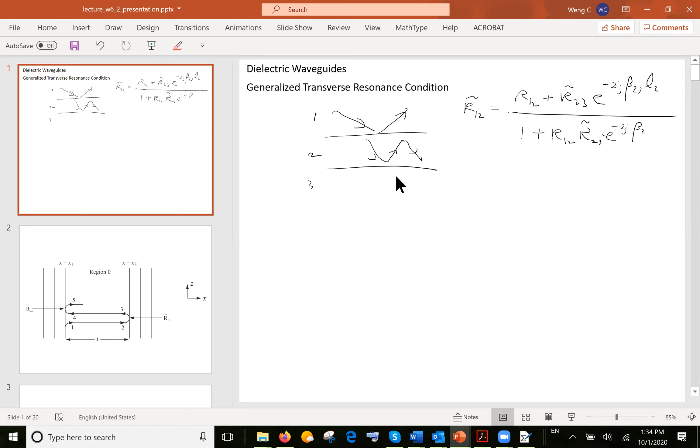Let me see, something messed up with my wiring. Okay, we show that when you have a layered medium, you can look for the reflection coefficient, the wave bounces back and forth inside. If this is 1, 2, 3, for instance, then we can say R12 tilde equals R12 plus R23 tilde times e to the minus 2j beta 2z L2, over 1 plus R12 R23 tilde e to the minus 2j beta 2z L2, where L2 is the length, or the thickness, of this slab.

And if we assume that medium 3 goes to infinity, then R23 tilde just becomes R23, which is the local Fresnel reflection coefficient. And the guidance condition is such that R12 tilde goes to infinity when a waveguide mode exists.

Because if a waveguide mode exists, then you don't need anything to excite it, and the waveguide mode would just be there, bouncing around. There'll be some evanescent wave in this waveguide mode, and then incident is zero—E incident is 0, E reflected is not 0. So if you compare incident to reflected, then R12 is infinity.

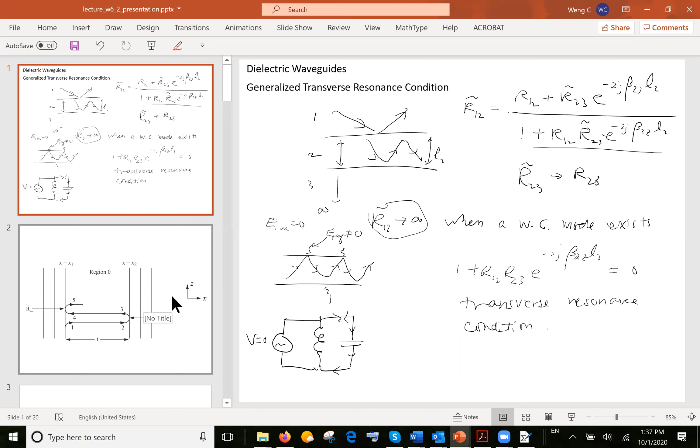Okay, so this concept can be applied for a general structure. The general structure is one that looks something like this.

Let's assume that you have a mode that is propagating in between two layered media. On the right hand side, you have a layered medium. And then on this side, you have another layered medium.

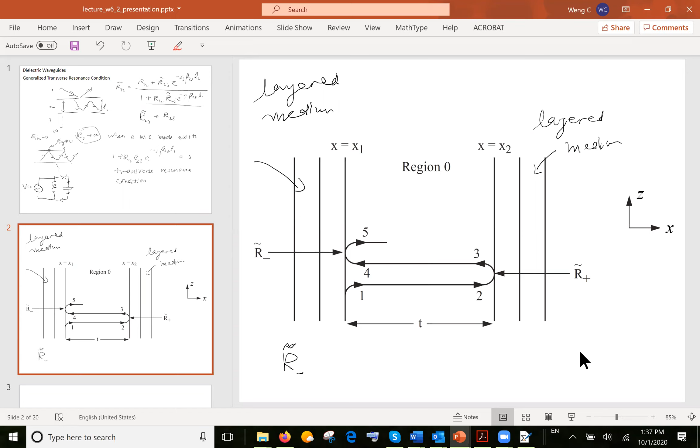And then you can define R minus tilde for a wave that is traveling like this, okay? And then you can also define R plus tilde for a wave that is bouncing off this side. And we know how to find this generalized reflection coefficient. We already figured out a formula to find this generalized reflection coefficient.

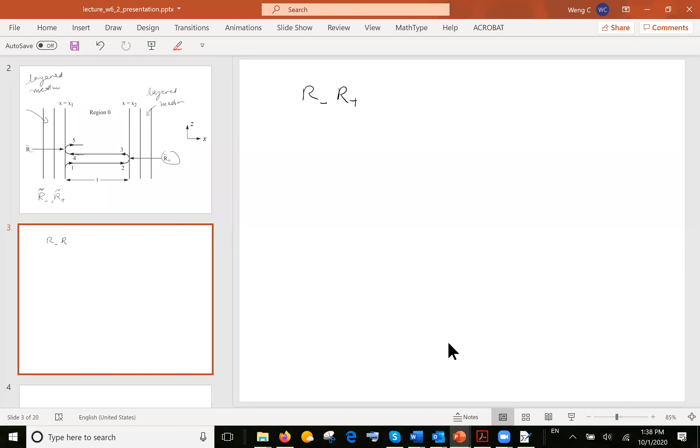Then the guidance condition is very similar to what we had before. The guidance condition is that R minus tilde, R plus tilde, e to the minus 2j beta 0, beta t z -- let me call this region T, tz -- T is equal to 1, okay? So if I call this region 0, I should use 0 here.

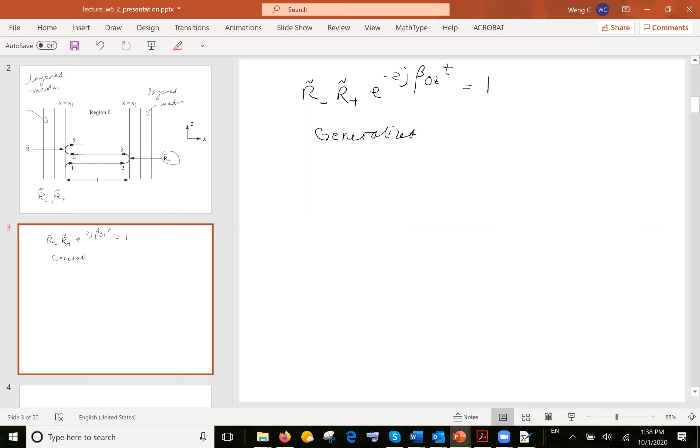Okay, and this has very good physical meaning, okay? And this is called the generalized transverse resonance condition.

And we can give it the same physical meaning as we had given before, which is that the wave travels -- you start with 1 at this place here. And then when it goes from 1 to 2, it acquires a phase. The phase that it acquires is j beta 0 z T. And then it bounces off the right interface, then it will have R plus tilde.

And then it goes off from right to left, it acquires another phase. And then it bounces off the left interface. So you can track the phase and the amplitude of the wave as it bounces around. And this must become itself. This is at location 5, then the wave becomes itself again.

And this is precisely what the above formula is saying. If you rewrite this, it's just R plus tilde, R minus tilde, e to the minus 2j beta 0 t equals 1. And this is exactly the same formula that we have derived before, using the argument that the denominator of the reflection coefficient of the dielectric slab should go to zero. Except for there is a minus sign here, so this one gave this. This is exactly the same condition as we have just derived using another argument.

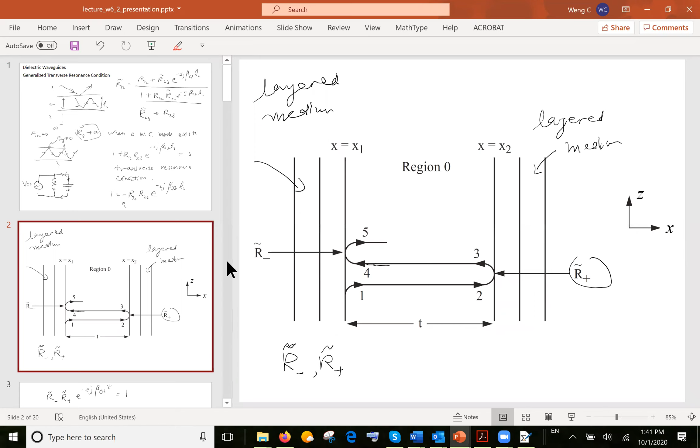Can anybody figure out why we have a minus sign here instead of a plus sign, whereas when I did this argument, I came up with the plus sign? There's no minus sign here, but then I have a minus sign here. Why do I have a minus sign here? Anybody wants to give it a try? Okay, nobody wants to give it a try. Let me give away the answer then.

The reason is because if you look at the Fresnel reflection coefficient, R12 is minus R21. R12 is defined as the local reflection coefficient when the wave is coming in, bouncing off like this. R21 is the other one -- region 2, region 1, the wave bounces off like this and gets transmitted like that. If you look at the Fresnel reflection coefficient, they're very similar to each other, except for the sign difference. That's why we have a minus sign there, okay?

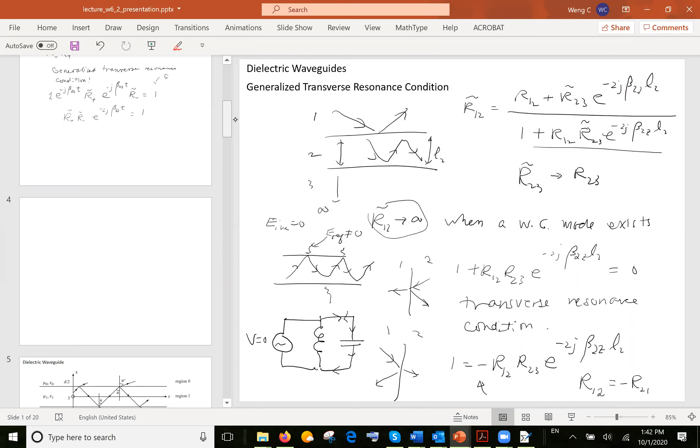So if you don't have any question, I will apply this concept to study a dielectric waveguide. No question, then apply these concepts to study a dielectric waveguide. And let me look at this special example over here. As I said before, this is a very important waveguide because the operating principle of this waveguide is very similar to that of the optical fiber.

Except that when you analyze the optical fiber, it is a cylindrical structure, whereas this one we're just assuming a dielectric slab, which is very simple. When you solve a problem in the cylindrical coordinate system, you have to use X, Y, Z, and then define a rho and a phi. Then you will have to work with Bessel functions. Whereas if you work with Cartesian coordinate system, you just have sinusoidal functions.

Bessel functions are like this. Let me just call it rho, maybe K rho, okay? And it will look something like this. You will have a peak, and then it will go like this. This is rho, this is J0 rho, for instance. It will look something like this.

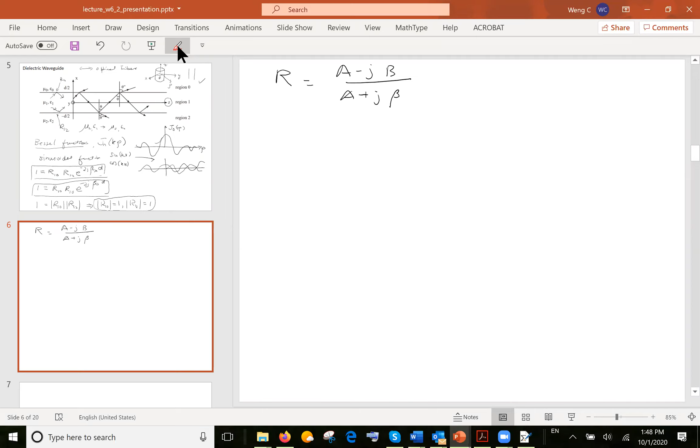Then there would be a Goos-Hänchen shift that happens. We studied that earlier, which is that the reflection coefficient will be of the form of A minus jB over A plus jB. Because if you recall, the Fresnel reflection coefficient R10 is of the form of mu 0 beta 1x minus mu 1 beta 0x over mu 0 beta 1x plus mu 1 beta 0x. This is just a simple Fresnel reflection coefficient, but for total internal reflection to occur, this must become an imaginary number.

And hence, if that becomes an imaginary number, then the Fresnel reflection coefficient is of that form, and then it has to have a phase shift. That phase shift can be worked out quite easily, because if there's a pure imaginary number, this will be B, this will be A, and then the phase shift is given by e to the j arctangent of minus B over A, divided by e to the j arctangent of B over A. So this is the phase of the numerator, this is the phase of the denominator, and then you can see that this is just equal to that.

Okay, you can work this phase out. Let's assume that beta 0x becomes a pure imaginary number, j alpha 0x. This means that if a wave were to propagate in region 0, we'd have minus alpha 0x, so the wave would be exponentially decaying in the x direction. This is the character of an evanescent wave.

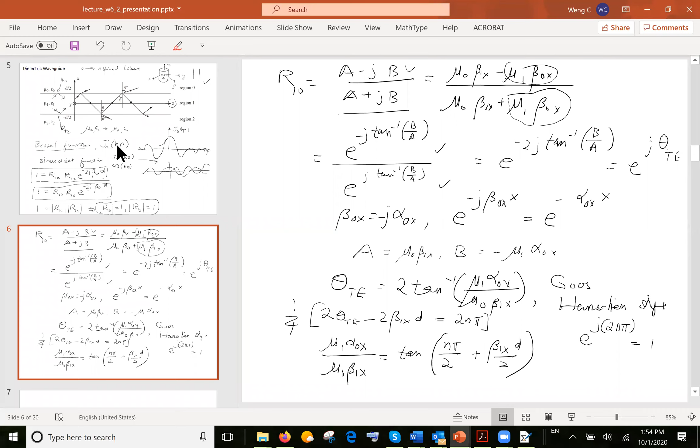Then how do I solve this equation? Solving this equation is non-trivial. Let's see how we can solve them. So this is what we call an implicit equation.

And what is the variable here? You notice that beta 0x is beta 0 squared minus beta z squared. Beta 1x is beta 1 squared minus beta z squared. And beta z is the same in all 3 regions.

If you go back to this again, beta z is equal to the same number in all 3 regions. What principle do we call that? If the wave is traveling down this waveguide, and if it has the phase of beta z z, this phase must be the same in this region, that region, that region, and that region.

And what condition do we say it was? Anybody wants to give it a try? We imposed this condition when we were studying the Fresnel reflection coefficient and when we were deriving it. We say that this condition has to be satisfied in order for the boundary condition to be always satisfied. What condition is that? Anybody? Let me see if there's anybody left. I still have 15 students in the class, so 15 people in the audience. So what condition do you call that? Anybody wants to give it a try?

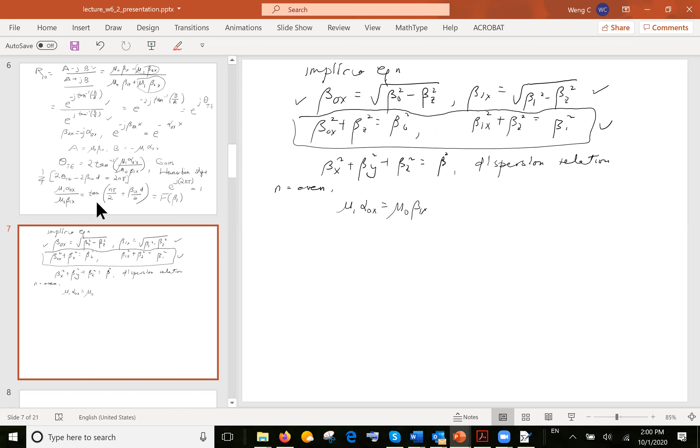So when n is even, the equation would be something like mu1 alpha 0x equal to mu 0 beta 1x, always having a tangent of beta 1x d over 2 on the right-hand side. Whereas if n is odd, the tangent becomes a cotangent. If you do things very properly, you find that there's an added minus sign as well.

So you have two families of equations. It turns out that the community of scholars have decided to plot this as a function of beta 1x d, because this function is a lot easier to plot if we plot it as a function of beta 1x d.

By some simple rewriting, you can actually write the first equation, the n even one, as mu1 over mu0... did I get it right? No, sorry, it should be mu 0 over mu1, beta 1x d over 2. I just multiply by d over 2, then tangent of beta 1x d over 2.

And then this is purely a function of beta 1x. The right-hand side, because of my multiplication and division, will be just d over 2, because I multiply by d over 2 on the other side. This is the n even case.

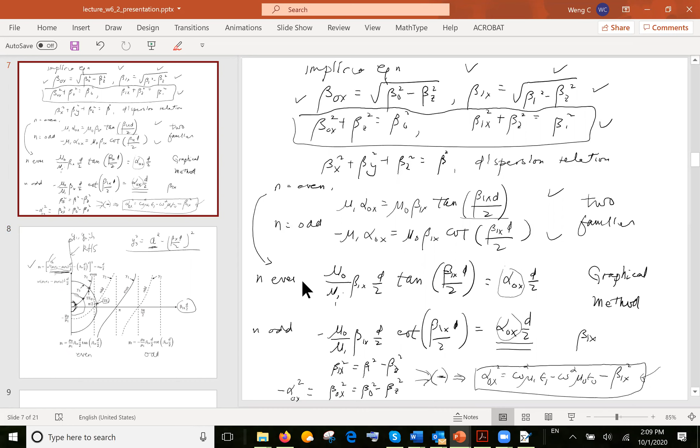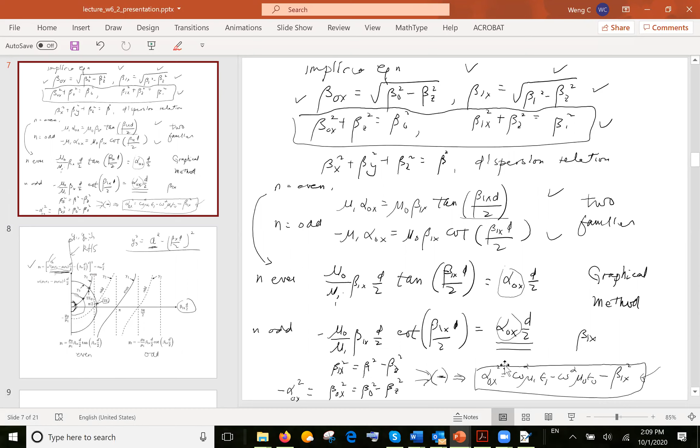The solution is given by the intersection point of the right-hand side curve with either one of the left-hand side curves. We have expressed all of them as a function of beta 1x. The right-hand side curve is the one that changes with frequency, because alpha 0x depends on frequency in this manner. Only the right-hand side plot depends on frequency, and you can change the frequency to change the radius of this circle.

What other design freedom do I have to make the radius of this circle bigger and bigger? Anybody want to try? Wouldn't it be the engineering material, your mu1 epsilon1? Yeah, I would try to make the contrast bigger. The outer medium is mu naught epsilon naught, and the dielectric slab, I will make this number bigger. Then that will make the radius bigger, and I will have more solutions and more guided modes.

What is the last design freedom I have to make the radius bigger? Change the width of the waveguide. Yes, very good, change the thickness of the slab. That is what D is. If you go and look at the D case, D is just the thickness of the dielectric slab waveguide, and if you make it bigger, you will have more and more solutions.

So there are three things, three salient features: making frequency high, making the contrast big, making the dielectric slab thick. All would increase the number of guided modes that you have in this waveguide. These three salient features are shared by the optical fiber waveguide as well.

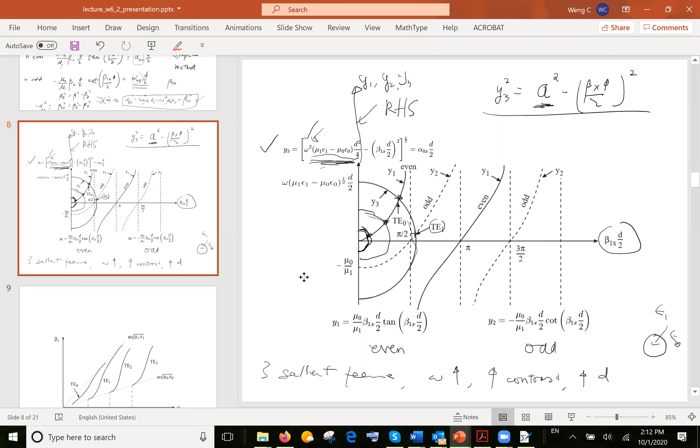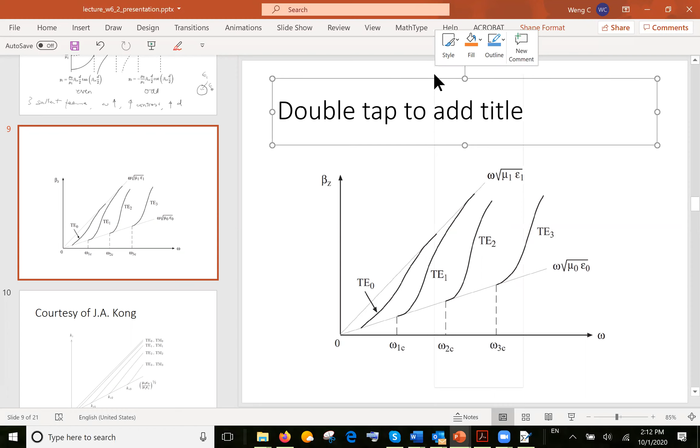So you can actually go about solving those solutions graphically or using a computer, and then after that you find your beta 1x. Beta 1x, remember, is related to beta z anyhow. So beta 1 squared is equal to beta 1x squared plus beta z squared. So once you found your beta 1x, you can find your beta z.

And then you can change your frequency to map out the beta z's of different guided modes in the slab. You'll find that as the frequency gets bigger, like for instance, if you pick this operating frequency, you will have 2 guided modes in this case. Here you have 2, or maybe 3 — I forgot this one, this one will go up there, so you have 3 guided modes. And if you lower the frequency, then you have only 1 guided mode, and you can map out this dispersion relationship.

So if I want to find the phase velocity of this guided mode, what do I do? If I found a solution here, and I know beta z is over there, what do I do to find the phase velocity of that guided mode? Anybody? V phase is omega over beta z. Very good, omega over beta z, that is the phase velocity.

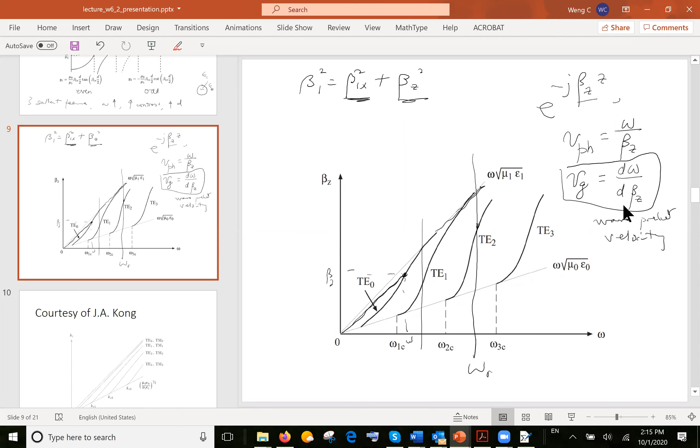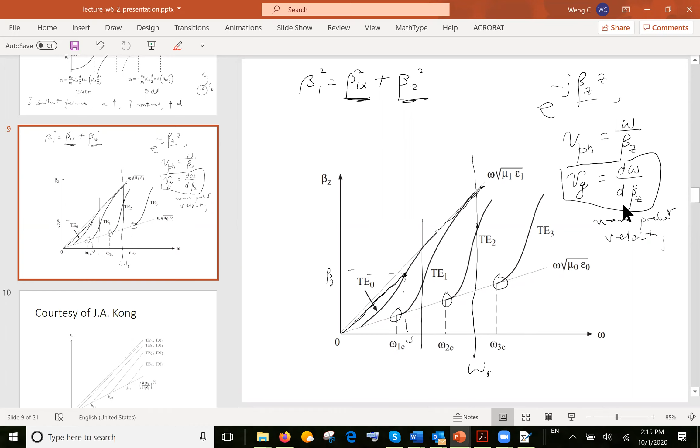Okay, you can see that this group and phase velocity will have all this interesting behavior, and I can give you physical explanation for why they behave like that in the lecture notes. I wouldn't go through them here, but you can do that for all the modes. Professor Kong has solved these modes using computers, and he has very nice curves - all these dispersion curves.

These will look something like that for both TE and TM case. So you can repeat the analysis for TM modes as well. They're very similar - instead of using the TE reflection coefficient, you use the TM reflection coefficient. You find that all these modes have the property of hugging this line, and you can give physical explanation as to why they do that.

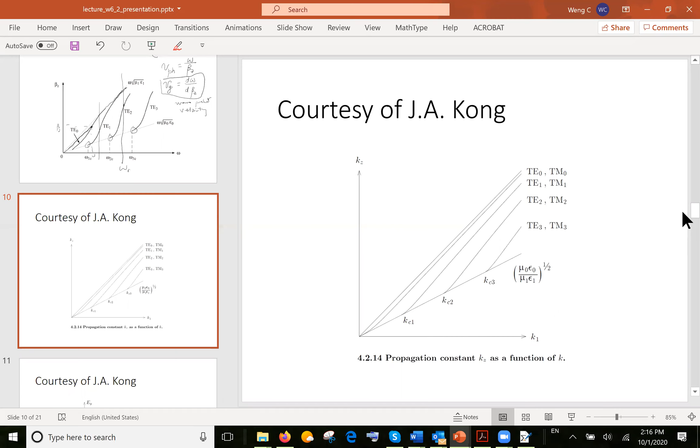After having obtained the modes, you can also plot the profile of the field inside, because after you've found beta 1x, you find that the wave inside would be something like cosine of beta 1x x inside, or sine of beta 1x x inside, and they will have different coefficients to be linearly superposed together, giving you all these modes.

The TE0 mode will be symmetric. TE1 will be odd. Outside, it will be e to the minus j - it will be evanescent outside, so it'll be like alpha 0x x kind of thing. And you can actually find all these decay constants outside and have this curve plotted.

Any questions? Any questions so far? Anybody have any questions? I have a question on how do those modes interfere in that waveguide?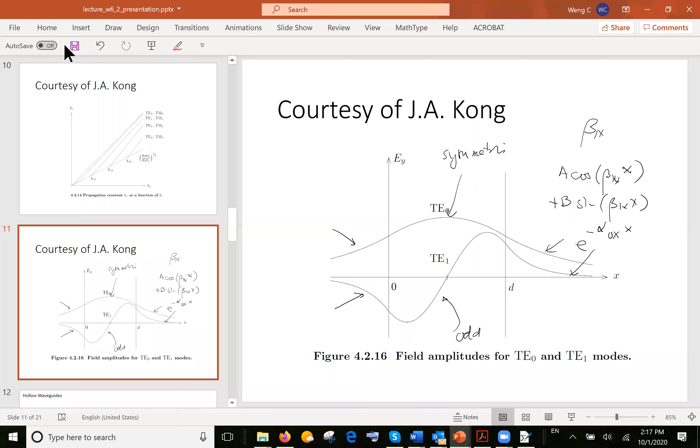Okay, how do they interfere? What do you mean by that? They will be guided, propagating in the z direction, but in the transverse direction, they will be like a standing wave. They become cosine or sine.

So we first assume that we have a guided mode, and that this guided mode is propagating like this, and then it will be bouncing back and forth in this dielectric slab by total internal reflection. So they will interfere and form a standing wave - these are truly standing waves. This standing wave can become either a sine or a cosine function in between the slab waveguide. So they interfere with each other to become a cosine standing wave or a sine standing wave.

And that's why you see this - this is a cosine, this is actually a sine. Outside, they'll be evanescent, they'll be decaying. Is that good enough answer for you? Yeah, I see the physics. Thank you. Okay, very good.

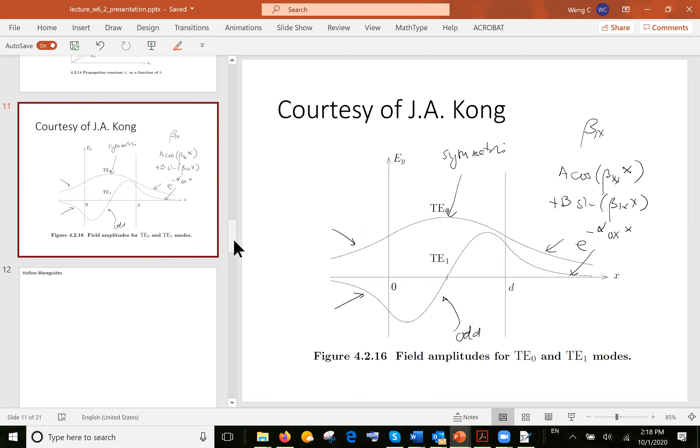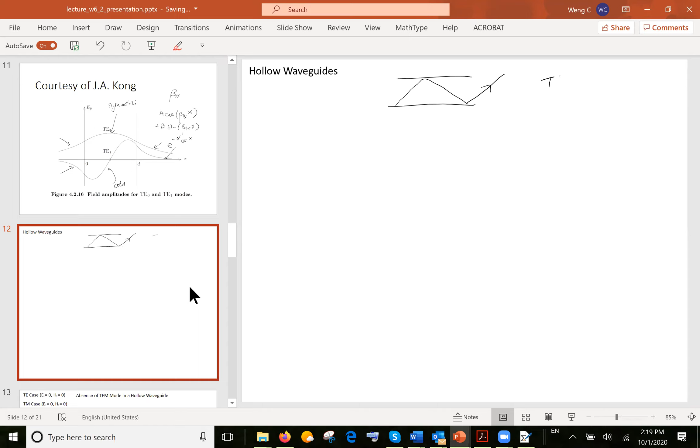Okay, so let's move on to hollow waveguide then. Hollow waveguide is very interesting because it is guided by completely different physics. In the previous waveguide that we studied, we use total internal reflection to guide the wave, so the wave is evanescent here, evanescent here, evanescent here. The wave just bounces back and forth by total internal reflection.

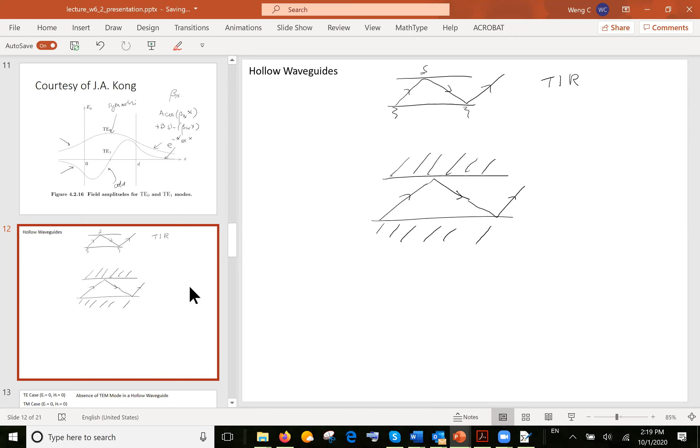But then for a metallic waveguide, you can make this out of metal for a very simple case - a parallel plate waveguide. Then the wave just bounces off because it's a sheet of metal and it has to repel the energy from the incoming wave. This is actually just a simple parallel plate waveguide.

You can actually get this parallel plate waveguide from the previous guidance condition that we studied before. We would have 1 equal to R10 squared e to the minus 2j beta 1x d - this was a guidance condition. But what does R10 become for a metallic plate? Do you know? If you have a metallic plate, it will be very similar to the reflection coefficient of a transmission line, where the voltage is 0.

Okay, what is gamma L for this problem? You send in a wave, the wave will come back at you, completely reflected. And do you know what the reflection coefficient for a short is? Minus 1. Very good, minus 1. Let me see, my phone is ringing - it's usually a scam call, okay?

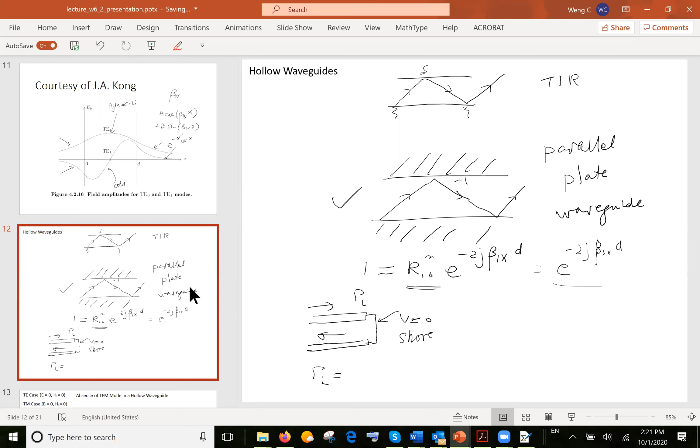So by the same token of analogy between metal parallel plate waveguide and transmission line, the reflection coefficient will be -1 for TE wave, and it will be +1 for TM wave. So this just becomes e to the minus 2j beta 1x d. And then you can actually work out the guided mode of a parallel plate waveguide quite easily using the knowledge you've just learned.

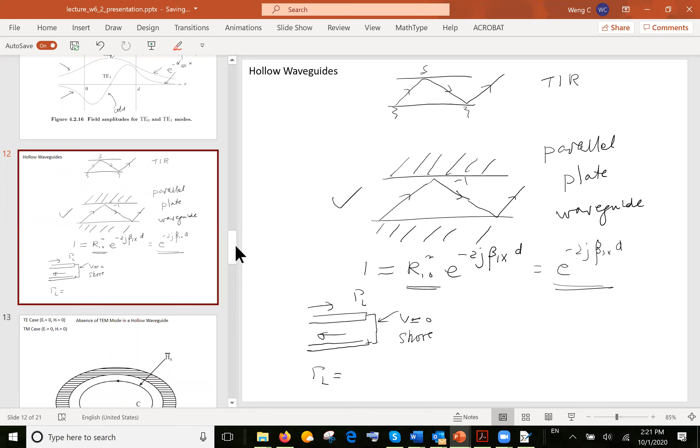In dielectric waveguide. But we are going to study not just parallel plate waveguide - two of the waveguides I'm going to cover in this course are a rectangular waveguide and a circular waveguide. These are simple enough to consider, but these are all metallic.

Metallic inside. So TE case is when Ez equals 0, Hz not equal to 0. I don't know how to make 'not equal' in my software over there, so they're supposed to be not equal there.

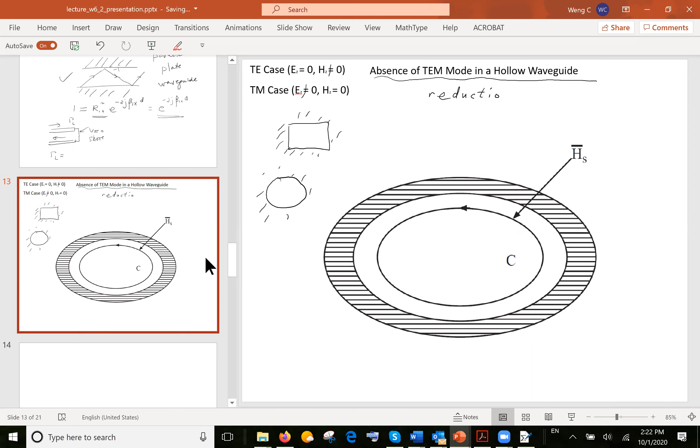So the first thing before I proceed, I'd like to argue that if I have a hollow waveguide, there couldn't be a TEM mode. And I like to argue this using the Latin symbol or Latin phrase, reductio ad absurdum.

This is a statement of proof by contradiction. How can we prove by contradiction that a TEM mode cannot exist? TEM means it's both TE and TM, with Ez equal to 0 and Hz equal to 0 - it's a combination of these two cases. We'd like to prove that that mode cannot exist inside a hollow waveguide.

So let's start by assuming that there's a mode that exists with a magnetic field. The magnetic field of that mode must look something like this - that is, the magnetic field must start and end on itself. There are no magnetic charges, so the magnetic field must look something like that.

Whereas for electric field, it doesn't have to look like that. Electric field might start with a positive charge on the waveguide wall and then end up with a negative charge on the other side of the waveguide wall. So electric field will look something like this, but magnetic field has to close on itself.

But then if you were to perform this integral, H dot dl, on this magnetic field lines, on this contour C, is this going to be a positive number, 0, or negative number? If you just stare at this magnetic field and perform this integration in your head, dot with a dl, you can do it numerically, plot a dot with a dl, and then take it around this contour and sum this up - what would this number be? Would it be positive or negative, or what do you think it should be, or 0?

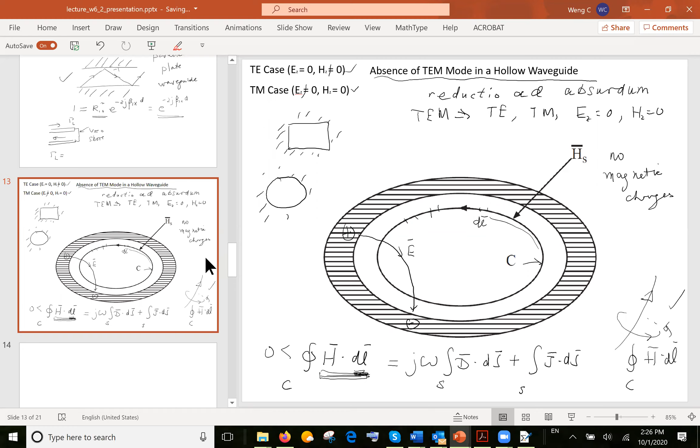I'm just writing Ampere's law in integral form. You could have written Ampere's law in differential form - differential operator form, you get that, and then you get that. So the left-hand side is not 0, so the right-hand side must somehow also be not zero. But this waveguide is hollow, it doesn't carry a current through it. S is this surface over here.

So this means that this term must be zero since there's no current going through that surface. The only way for the right-hand side not to be zero is for this other term not to be zero. Agree? Since the left-hand side is not zero, the right-hand side cannot be zero. S is that surface over there, and N hat is Z hat on this surface. So what do you know about Dz?

Is it equal to 0 or not equal to 0? Anybody? Is Dz 0 or not 0 in this hollow waveguide? It would depend if you're in the TE case or the TM case. Well, I'm saying that if I just plot the field, I'm not even distinguishing these two cases yet - you're correct, but you're jumping ahead and went to the TE case.

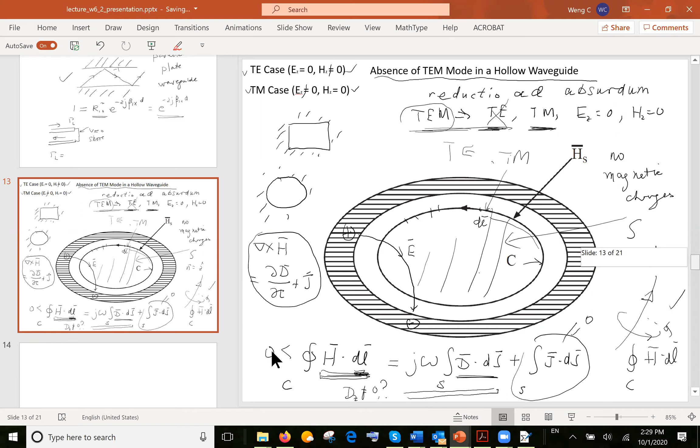Okay, so now that we know that the mode inside the waveguide is either TE or TM, we can go about solving for those modes. And let's begin with the TE case.

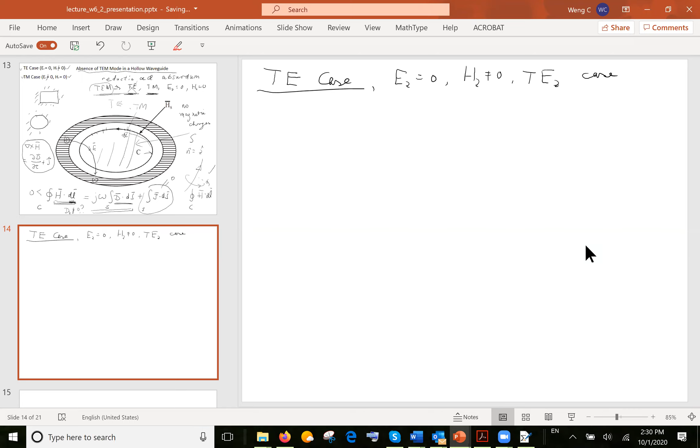TE case, then Ez equal to 0 and Hz is not equal to 0. Some people call this TE to Z case, just to be more specific. So how do I write down the mode of a waveguide of arbitrary shape? That the waveguide is always supporting a TE mode. I use what is called the pilot vector potential approach.

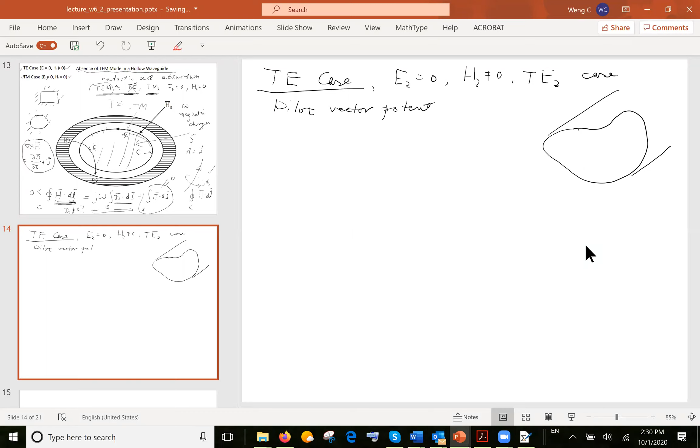And in this case, what you do is that you design an electric field that is curl of a vector potential, okay, that only has a Z component. And if you were to take the curl of this function, sorry, this is not a function of Z, but a function of R. If you were to take the curl of this function, can you see that Ez equal to 0?

Ez has to be 0. Can anybody give the explanation as to why Ez has to be 0? Anybody? Why does Ez have to be 0? So because it's... oh no, I don't know.

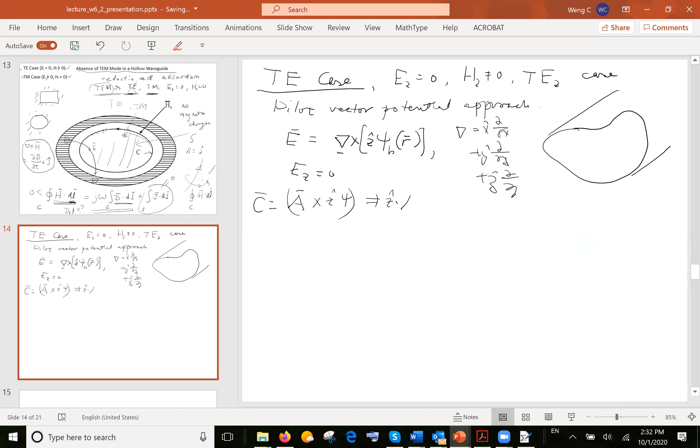Well, I can do the long algebra. You can work out the long algebra, write up the del operator. And then when you do the algebra, you find that there's no z component, right? It's just simple algebra, the same as A cross Z, you just do this simple algebra. That means that if I call this vector C, Z dot C must be 0. If you plug this in and do the algebra, it's the same as the algebra that you need here, and Ez will be 0.

Is this clear to everybody? Why, if I design a vector potential in this manner, this E does not have a Z component? Is this clear? Yes. Okay, very good. Then I can move on.

And then is it also clear to everybody the divergence of E equal to 0? Okay, this is a source-free region. It's a waveguide, source-free. And is it clear to me or to you why divergence of E equal to 0? Because if it's source-free, this has to be true. So any solution that I try to construct has to have divergence of E equal to 0.

Can you see why divergence of E equal to 0? Can anybody tell me the important theorem or important algebraic knowledge that you have that immediately shows you that divergence of E equal to 0? Divergence of the curl is 0. Very good. Divergence of a curl is always equal to 0, okay? Very good. Divergence of curl of anything, okay, anything. Very good. It's equal to 0.

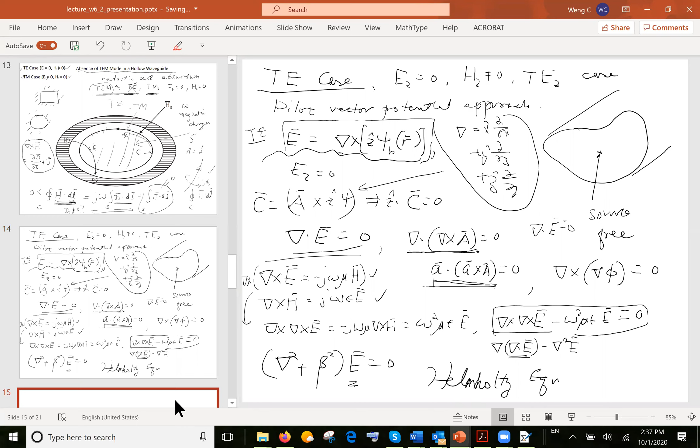which is called the Helmholtz equation. And then now I can plug in my guess, my constructed E, into there. If you plug your constructed E into this thing, what you find is that it's just plugging in. I'm going to skip a few steps here.

Just plug in and exchange the order of integration and differentiation, and so you will have something like the equations to be satisfied would be something like curl cross Z psi H is equal to 0. And then I'm going to exchange the order of this operator and this operator.

In mathematics, we say if two operators are commuting, this is called a commutator. You can think of them as matrix operators if you want to. And this being 0 means that A dot B equals B dot A. When the commutator of two operators is 0, we say that the two operators commute. You can very easily show that these two operators commute because they commute in this fashion, and hence I can bring the operator inside and take the other operator outside.

Is equal to 0. And then if I find psi of H that satisfies this equation, if I make sure that all the psi of H that I have satisfies this equation, and if this equation is satisfied, it means that equation is satisfied. It means that the electric field that I have constructed in this manner using the vector potential would satisfy Maxwell's equation. You work backward and make sure that this satisfies Maxwell's equation.

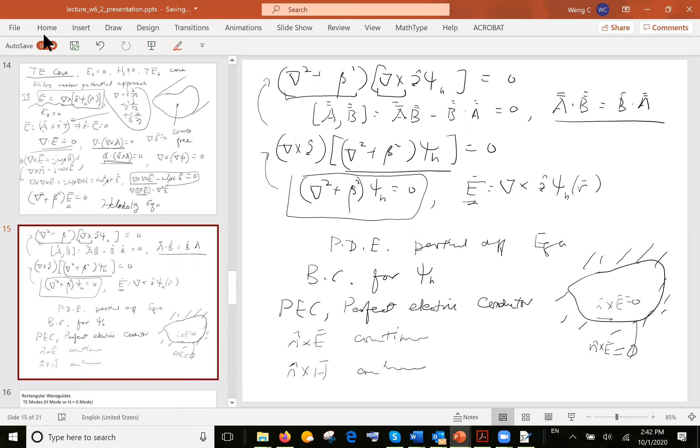So if n cross E is equal to 0 on the waveguide wall, but E by construction is curl cross Z of psi equal to 0. And then we have to apply the BAC-CAB formula again.

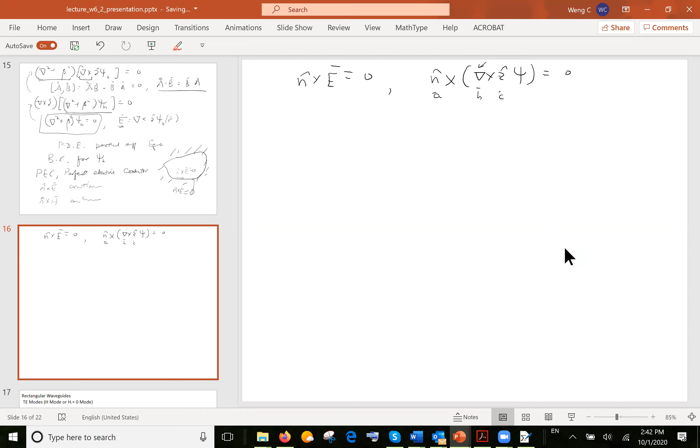Call this A, B, C. But when you apply the BAC-CAB formula, you better make sure that this is an operator and you have to put it in the correct position when you apply this formula.

So if I say that this is the BAC-CAB formula, so the del Z dot n psi, minus CAB would be Z, n dot del psi. Okay, then that has to be 0. But what do you know about Z dot n on the waveguide wall?

You have a waveguide, Z is pointing out like this. On the waveguide wall, what should Z dot n be equal to? They're orthogonal, so 0. Z and n always are orthogonal on the waveguide wall, so this should be 0.

And then you will have n dot grad psi equal to 0 on the waveguide wall. This is called a normal derivative. It can also be written in this manner, or sometimes it's written in this manner.

So the boundary condition that we have translated to for the scalar potential, the vector potential, the scaling factor, would be that we solve this PDE for psi sub H equal to 0 with the boundary condition that this is equal to 0. This is called the Neumann boundary condition.

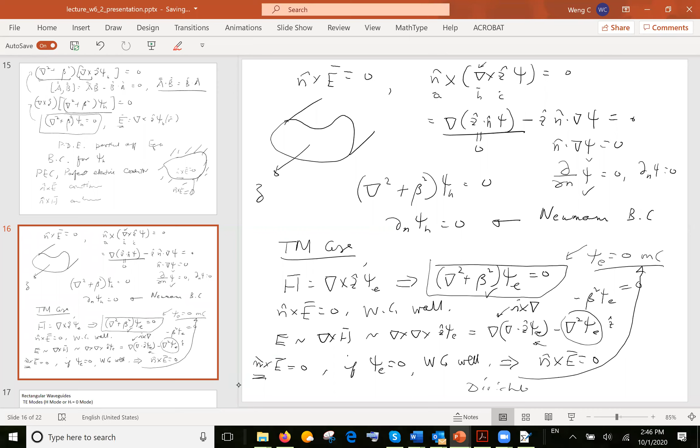So if this is true, then n cross E is equal to 0. So for the TM case, you solve this equation with this boundary condition on psi, on the waveguide wall. This is called the Dirichlet boundary condition.

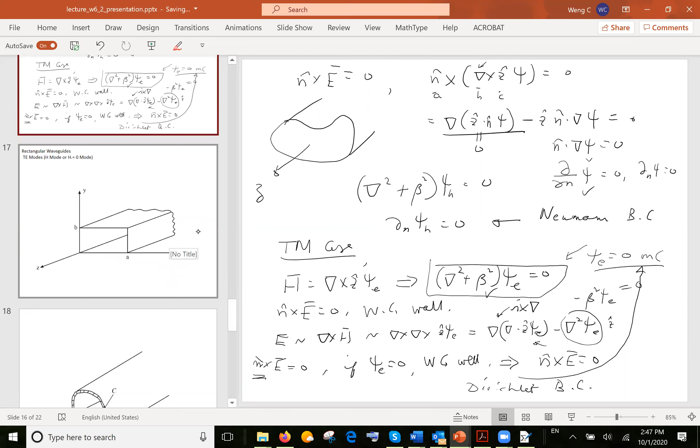And then you can actually apply this knowledge now to solve for the rectangular waveguide case. I don't have time to go through the rectangular waveguide case, but the great thing about it is that... so I don't have time to go through it now. I'll go through it in the next lecture then. Okay, so I'll stop here.